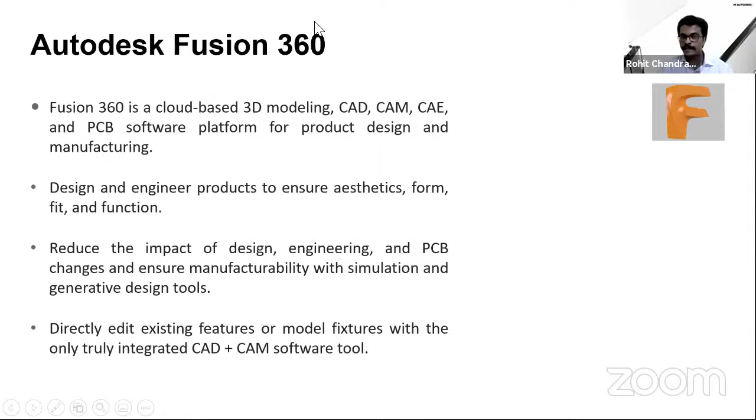Our focus is on industrial design technology alone. We are not going to divert much to CAM, but I will give an introduction to that. Our main focus is how you can start from scratch, create your own model, and for the competition, if you are provided with a problem statement, how you can understand it and use our software to turn that into a creative outcome.

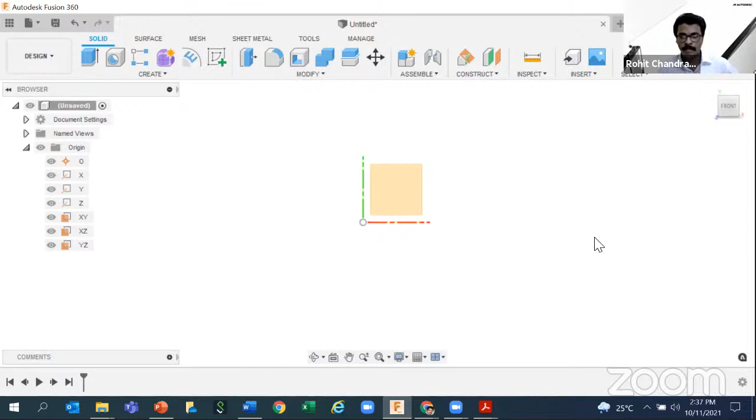Also, please understand there are some color codes here — very easy to understand, you don't need to memorize anything, because this may be the simplest software that you can understand in a few hours. I'll take you through the quickest approach so you understand most of the tools, and apply that knowledge to your live models as well.

So let's move forward. The canvas, the browser, where it comes as a tree, sub options will be there, and at the bottom it's known as the timeline. Right now it's blank, nothing is there, but shortly it will be filled with some options.

You definitely need a 3-button mouse, with individual left, right, middle, and scroll functions — all of these are applicable inside Fusion 360. Primary selection can be the left click, but you can change the mouse settings as well — everything is user friendly, you can change it.

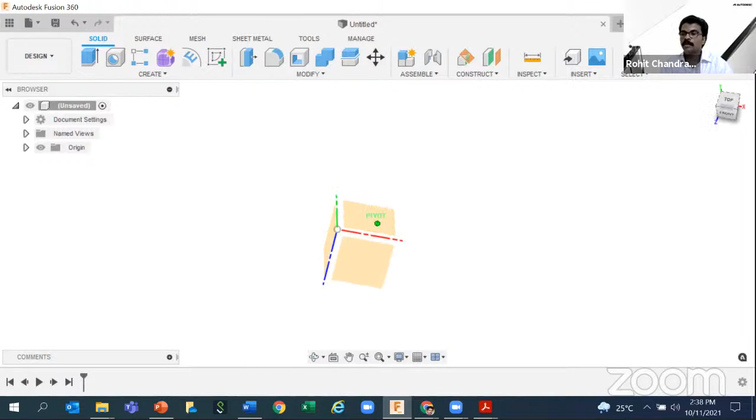There's a cube on the top right corner, with each of the 6 faces designated with an individual name — front, top, side, and so on. I can click on each view and hover to that view directly using my left mouse button. I can scroll in and out to zoom in and zoom out.

Never mind, nothing is there, but small change is there once I click on zoom in and zoom out. Hold down your middle mouse button to pan. So very simple. If you want to make any primary selection, left click is your choice. Then if you want to move something, pan is the option.

Scroll in and scroll out, zoom in and zoom out. Again, there is one extra option for you guys, known as the marking menu, by just right clicking. That's it. So we have some advanced people, some intermediate also there, so I'm not going to go too much on scratch. Meanwhile, we will share the contents.

Just to give a heads up to those who are new, so you understand quickly how the software is working. The canvas, the view cube, the origin plane, and the axes are color coded with RGB - red, green, blue - in accordance with the same axis. So it's very easy to understand which axis, which plane you are in right now.

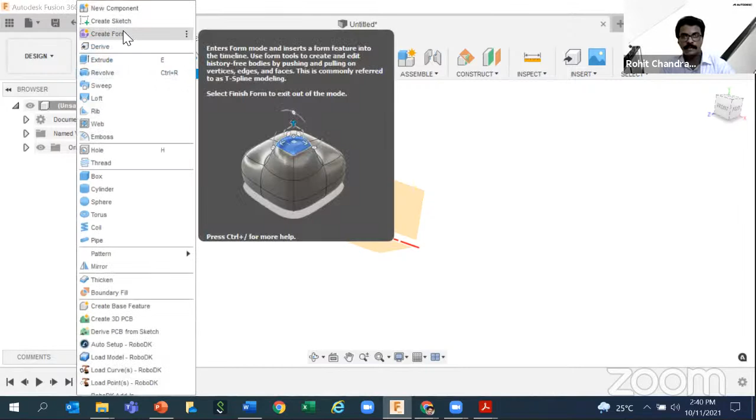Now we have something known as create, modify, all those things. But again, lots of minute options are here, maybe confusing to you. So I will tell you the quickest approach: start from left to right, as you read a newspaper or any book or anything that you like. Some creating options are there, where the sketch is also mentioned.

And the modification options where you can modify the created steps. Then there is an assembly option to assemble those things which are created and modified, and a few more extra support options. I will explain in detail. I don't want you to get confused.

So we are going to start a sketch right now. We will make a 3D model out of that, and that will be a different 3D model option. I told you about some color thing, color code, right? So here the color is actually on blue.

And if I click on this surface option, I can see orange is coming. And when I click on this mesh, some other shade is coming. But they have some unique shade, right? Solid is all blue.

So just understand these are the tools for doing your solid modeling, which have some definite thickness. Surface means no thickness, but you can have similar - not the same, similar - create option, modify option, something extra will be there, as these are for the surface modeling. Then sheet metals are there.

So all these are actually interrelated. Whatever you do with surface, it can be thickened to make it a solid body. So it's like a communication to and fro - not a separate thing. Just one type of modeling and another type of modeling, and together we can collaborate and create an assembly. That's the story you can understand from here.

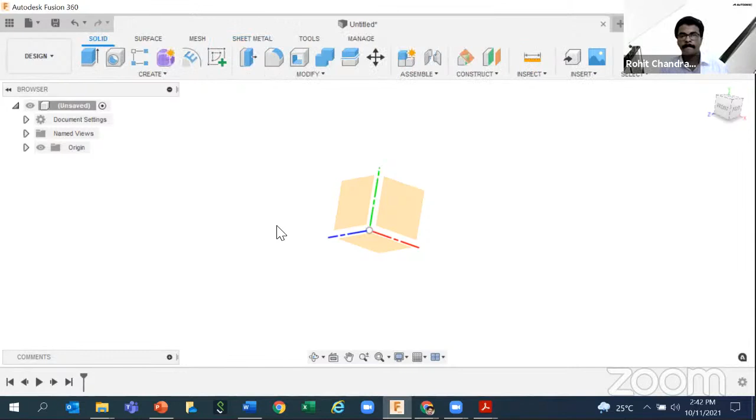Now, before going for the sketch, one more interesting tool is that I told you this is the cloud software. Before going, let me ask Shubham that everything is fine, or can I move on, or what's the status.

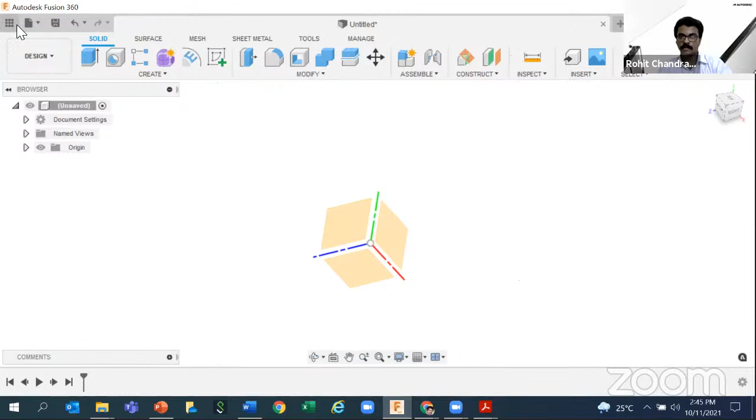This is nothing but the data panel. On the top left corner, you can see the data panel, a small 3x3 matrix icon. Just click on that and a floating box comes out from left to right of your screen. Once I scroll down, I can see lots of folder-like things, which are actually known as projects. I'll explain this in a few minutes so you can start along with it.

On the top left corner, you also see something known as team account. If you remember, this is the name you gave initially to set up Fusion 360. That's why I mentioned you can give your own name or some fancy or unique name, anything you like, and it will come to your account only, showing on the top left corner as your team account. By default, everyone has a Fusion team for their account, and the name shows on top left. Very easy concept.

Now I'll tell you how you can enable a new project and how you can share access with your colleagues. There's an option called 'new project.' Just go there and type a title for your project, for example, IDT.

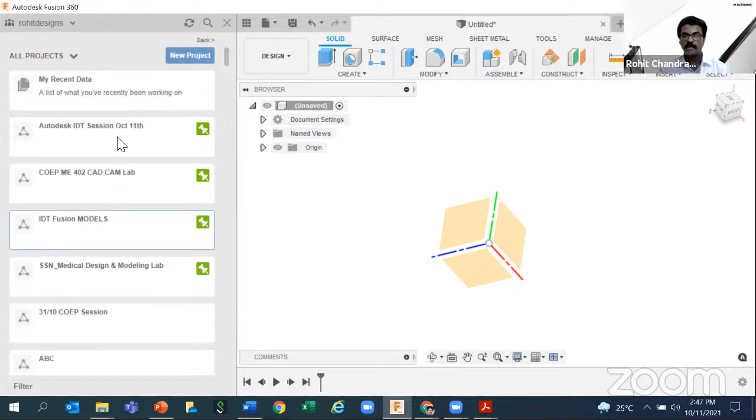Fusion models, this is actually your project name. For initial users, you won't have this many projects like I do. But it's a simple concept: whatever project you type will be listed in alphabetic sorting. Since this is my usual account with multiple projects in my cloud, I want to pin it irrespective of alphabetic order. There's a small pin and unpin option for that. So this is it, just now created project.

Right now nothing is there. So we basically have how many tabs? 1, 2, 3, 4, plus a gear symbol and a globe symbol. In just 2 minutes I can explain this, because it's a very interesting concept.

Data means whatever data you upload will come inside this data content. So how to start? Upload - you can select a file from your desktop, and I'm just uploading one file from my desktop.

Before uploading, let me tell you that Fusion 360 acts as a bridge between other software as well. That means if you have a non-native Fusion file, you can still open it in Fusion 360, and the extension type of that file will be automatically detected. If it's a STEP file, IGES file, or an STL file, it will be automatically recognized by the software.

Right now, this is a native file - F3D stands for Fusion 3D. Size and everything will show up. I'm just uploading this for showcasing purposes, to the current project. While uploading, you're not supposed to keep that window open - once you've scheduled the job to the cloud, you can do any other parallel activity. You don't need to wait until the cloud upload process completes.

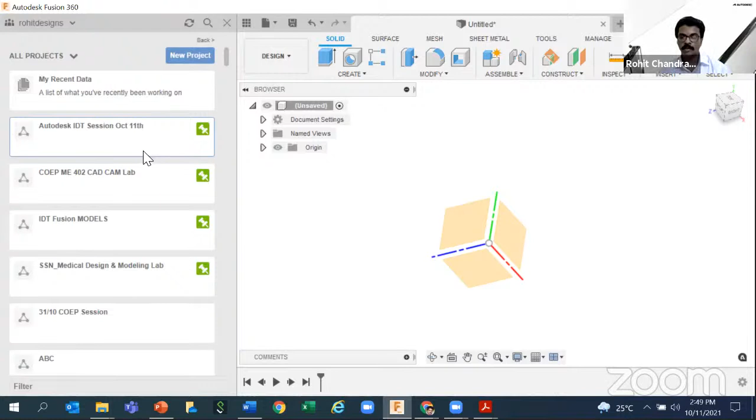So some extra subfolders are there, and I had invited multiple people. Just type their mail ID, click on invite. That's it, nothing else. You can create your own project right now and start saving to that specific project, so that it acts as your cloud storage. You don't need to save to your system; whatever you do primarily goes to the cloud, saving huge space. So you can start creating a new project with Fusion Teams and put everything there.

Okay, we'll come to the contents right now. This is a quick explanation of the data collaboration part. It's not yet fully done because I explained sharing with people - just type their mail ID and click on invite. Automatically there will be an auto invitation sent to your invited members' mail ID, and the person has to just switch the account from the top here, the switching option is there. But if I go on explaining, it's actually boring.

So in the shared drive that I shared with you, there's a detailed guide on what Fusion Teams is and how you can start over. Once you get access, you can understand how quickly you can access all those things. But for starting, this will do - create a new project, and if you want to upload you can do that, or click on this floppy disk symbol to save anything you do here to your respective project. That's how it works.

Now let's start with the sketching. Small sketching - I will explain how to start a sketch. So where does sketching come from? It goes to Create Sketch. Any plane I can select - I'll select this plane, so that means the XY plane is an axis pointing towards me. All the tools are 2D this time because we are in the 2D environment.

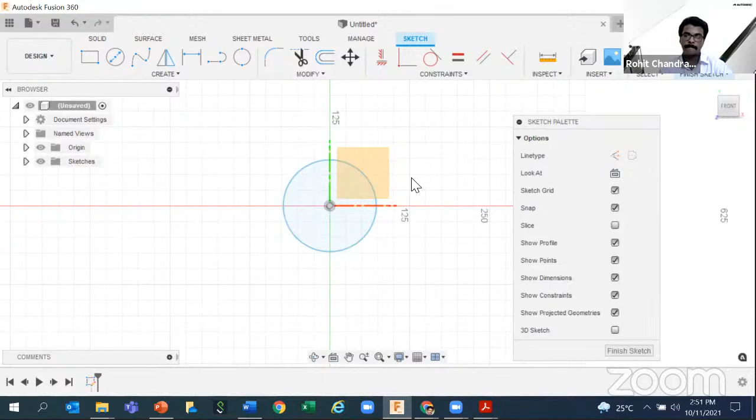Let's say I take one circle - and for circle I have more options, so many options are there. I will just take one center diameter circle, click on escape, so I had activated a circle. Now the circle is about to increase, meaning shrink - you can shrink it or scale it, increase or decrease the size, because I hadn't specified any dimension. That's why it's coming as blue.

Now let me take some lines here - that too comes as the same thing. But before clicking on the endpoints, there are some recurring values, so let me give some values there - 100 or 90, tab, 180. So I can have a specific value as well. Either I can play with the tools or go more specific and constrain it specifically, that's the meaning.

So simply what I meant is, for a rectangle, I can skip the dimension so the rectangle will come like this. But if you want to give the dimension, there is a dimension tool. Like this, numerous options are there in Fusion. So what is the best method? You can get the tools instantly and do the job and finish it.

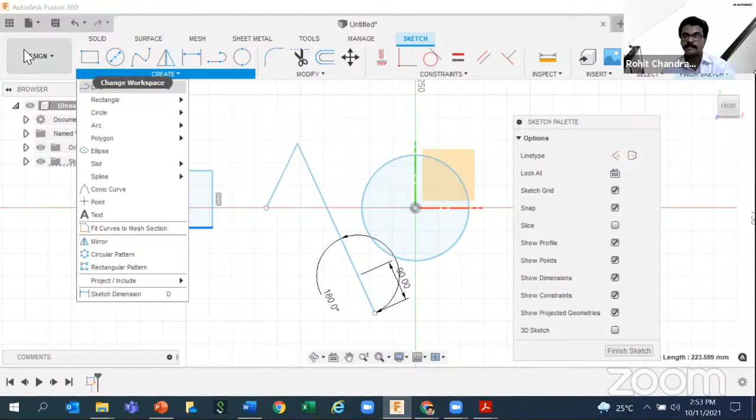If you want a line, there is a shortcut - L command. If you want a circle, C. But other types of circles are there too. To easily call all the commands, whether in sketch, design, or manufacturing, in one go, we have a shortcut method for you - just type S on your keyboard. S for shortcuts, capital or small, not case sensitive. Then type the thing you want, say line, and you will get the line command.

That's it, again type S anywhere. Type S and type rectangle, and you will get whatever command starts with rectangle - that phrase will appear here. So this is the easiest method, instead of directly going from Create to Modify to find the option, type S and get the command you want. But that's not the big thing, we have two more things to understand here. For the rectangle, I have to dimension this - so type S, you can either type dimension or simply type D. S is the thing you can always remember.

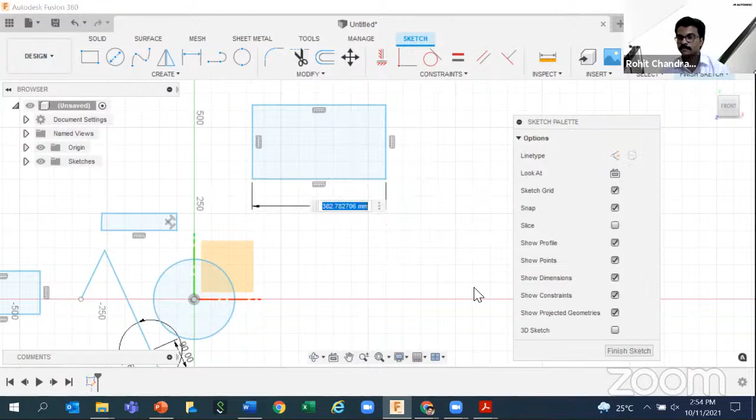Next, I'm just giving some dimensional constraints so that it won't grow or shrink, because it's 200 by 200. Clearly that's a square, but I have more intention. I have to fix this guy. So either I can use the dimensional constraint by typing S dimension, or just type D to activate the tool.

You can set a value so that it's 100 mm away from the y-axis. Same thing you can do here as well.

So it's actually constrained. All other guys are blue, this is black. This is one type of constraining: give the dimension with respect to others, block all the degrees of freedom, so it turned into black. Similarly, I have one more choice.

Again, I am simply deleting the constraints. Deleting means click on any entity you want. There are some symbols also, I will come to that. Right now, once you create anything, you can skip the dimension, and later you can give the dimension. Or you can give the dimension in the starting and proceed.

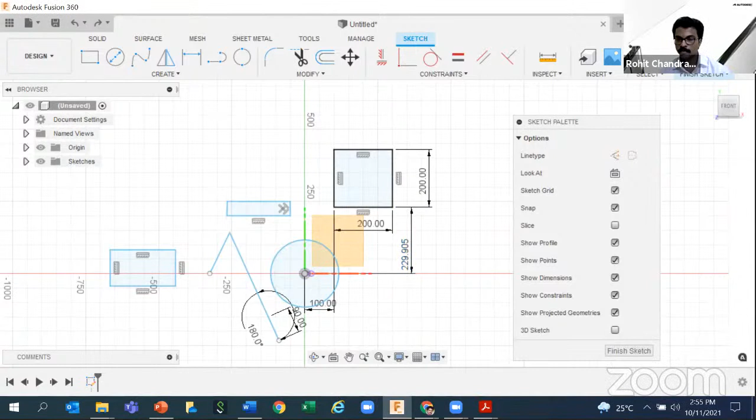I'm audible, no, Shubham? Yes sir, Shubham, can you please confirm whether my audio is clear? Yeah, your audio is very clear. Hello? Hello, I cannot hear you, Shubham. Am I audible? One second. Can you put in chat if I cannot hear you, Shubham? Am I audible now?

Okay, thanks. So if you draw something, you can constrain that. Constraint means limit the degrees of freedom, using dimensions, or again a new thing, known as geometrical constraint. Once I open the door to these other options, quickly you can understand these new sets of tools, some with symbols. It's a type of constraining tool. So few tools I will show, then we will move forward with the live example.

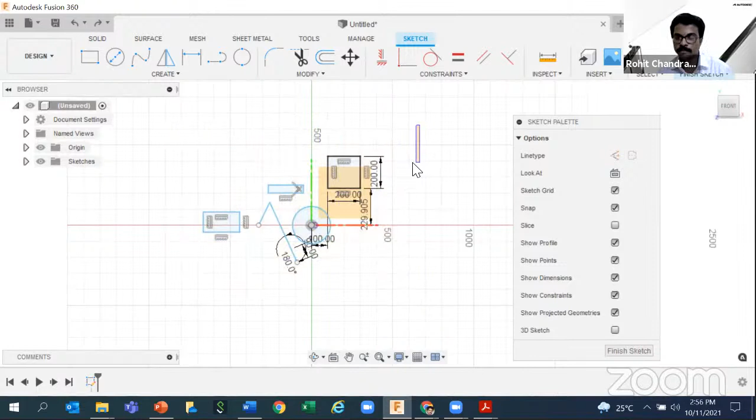Correct? So here I am just deleting all those things. I am just dragging, selecting inside my window, and just deleting. Clicking the delete key on your keyboard, or right click delete from the marking menu. Many user-friendly options are there. So just understand, this is a software which has multiple features. Whichever you feel okay with, you can do that, with a combination of one tool, or just using the shortcuts that you feel right, and you can complete your designing.

So I'm just selecting here. Either I can do right click delete, and it will be deleted, or modify. You can check the available options, that you want to make it trimming, extra things are there. Okay, I'm not touching all, what is too relevant I'm just touching, because we have more things on the way.

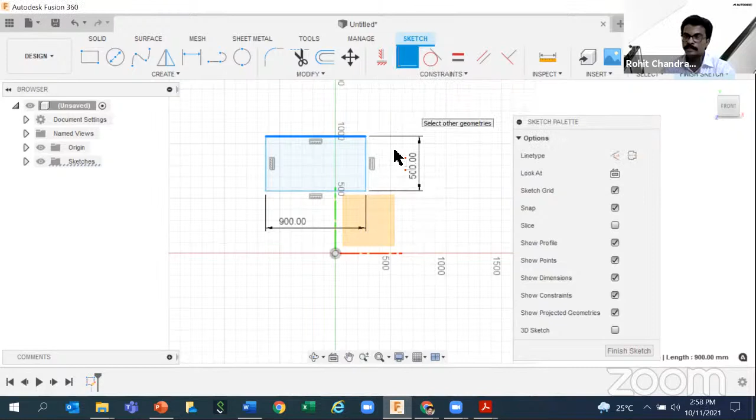Right, so here also just keep dimensioning. Then I told you it got constrained, but one more thing I have to do is make it geometrically related. So there is one option known as coincident. I can click here and click this point, so that it will automatically merge point to point. So it will be clearly coincident.

Similarly, if you have a circle of, let's say, 200, then I have a line, I can use the tangent constraint. So basically it means establishing a geometrical relation between two sketch entities. So I can constrain that - constraint means from there onwards, if I try to move, it's constrained to that path.

But here it's black. That means it has all the geometrical definitions as well as the dimensional definitions, so that's why the sketch is black. Otherwise it will be blue. Blue means free to move, it's not fully constrained - maybe partially constrained, or completely having full freedom of movement. So that's the concept for constraining.

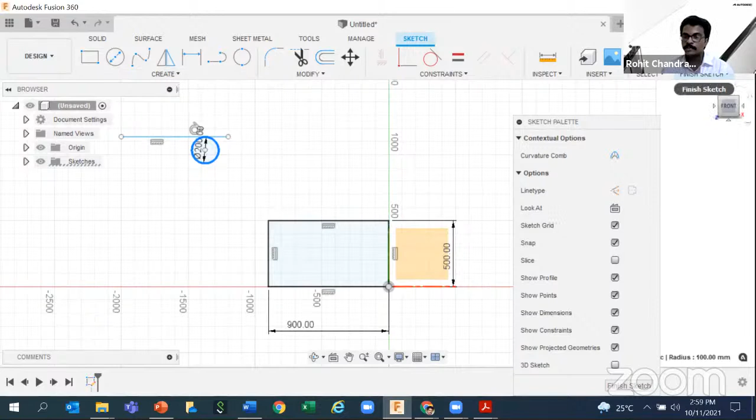Okay, so right now what I can do is click on Finish Sketch. So I have two things with me: the blue category guys and the black thing. This is the black part, meaning it's constrained, so it's not free to move. Blue, free to move - I can do like this. If the circle also doesn't have the dimension, I can even make it bigger or smaller. But I had given a dimension for the circle.

Right, now what we are going to do is go for the 3D modeling. So one command I will show directly, and from the next command onwards we can go forward with some examples. So this I am just creating, I'm just showing how we can use this rectangular sketch to make it 3D.

But before that, even if you are new to CAD, please understand extrude, revolve, loft, and sweep - these four options will be default in all CAD softwares. The name will be different, like subtractive blend, or push pull, press pull, but the concept remains the same. The good news is that inside Fusion we have a few more extra options to help you. So one is the extrude.

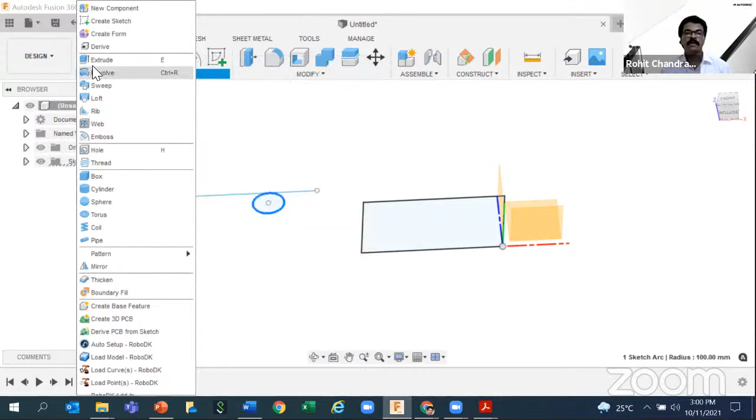Extrude. This is the extrude. Directly type the value either in the up direction or the down direction, plus and minus. Then if you want a small tapering, other software may have an extra option called draft, but here we have that direct option with us. You can give a minus angle or plus angle, and based on that you get the result.

You can also explore whether you want to go with two-side extrude or one-side extrude, because based on the application, just knowing what the tool is won't always help. So my suggestion is, once you learn one tool, in your next designing attempt, try to explore a few more extra sub-options.

Even if that gives you a wrong result, never mind, we will learn something, right? Or else we will explore other learning areas on how to use that tool specifically. But don't limit yourself to limited options. Whatever you know, the knowledge may be limited, so try to accompany it with other sub-options. Why I'm telling you this is that in the IDT category, time constraints are there.

So if your friend can complete a similar design in 1.5 hours but you are taking more time, that means if there is some choice in the tools, some optimized tool process or approach, you can select it so you can finish on time. So make sure you have good exposure to the tools.

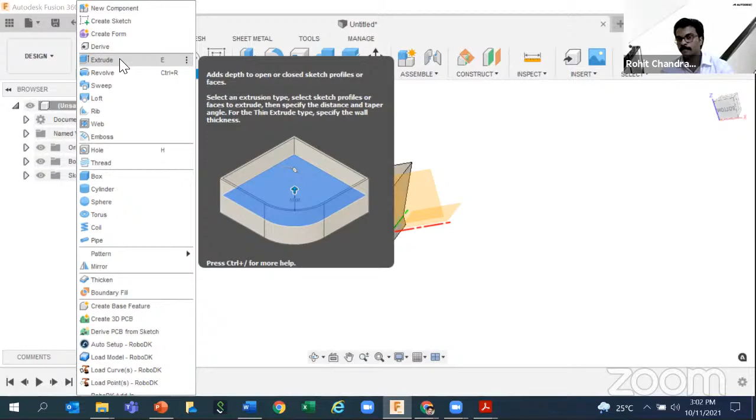Right, so just now I did a small extrude. What is extrude anyway? Just move your mouse over the top, don't click it, just hover your mouse. We can see what extrude is - it adds depth to your sketched profile clearly.

And if you want to call the extrude command again, type S and type extrude. So you will have extrude. But I told you there is a small color thing also there - blue goes for solid, orange goes for surface, and purple is something else, known as freeform modeling, which we will explain today. Right now, if you are seeing a blue extrude, that means it's for solid modeling.

Once you understand the basic thing, it's easy for you. Only thing is you have to understand what this blue highlight means, because if you're in surface mode, extrude is there too, but that's just surface extrude, no thickness.

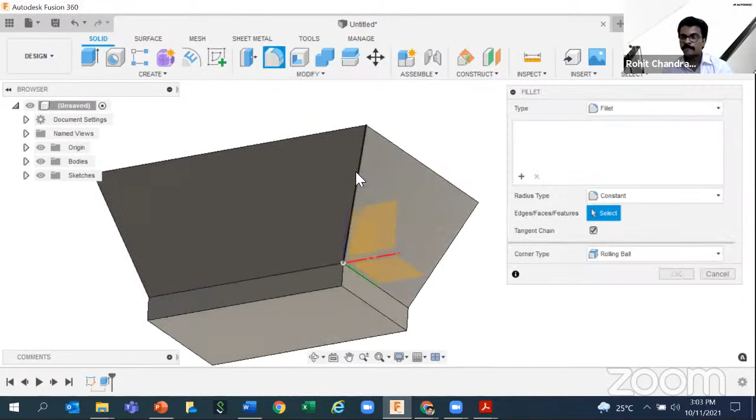Extrude may be boring to you because there isn't that much interesting to see, right? So to create some interest, we can do some extra features in modify commands. The first option is fillet. I'm selecting fillet because it's a user-friendly option, and we can see fillets anywhere in our daily life.

So you can do this, adding a radius, or just removing the sharpness - that's the meaning. Anywhere, if you're a designer or want to design anything, you will automatically give this fillet, because if you want to 3D print that thing and it's too sharp, it will hurt you. So it's always better to have a small radius to round off that sharpness.

So that goes for the fillet. Just give that radius value, clearly a radius value, and click OK. Again you can type fillet and you'll get the command. So accessing the command is easy.

Only thing is, I say just use your imagination - if you think 'I've done up to this, now I want to remove the corners,' it's something known as fillet. Even if you don't know where the fillet is, type S and get the command. Here it is, so I found the fillet. I tried here, and when I gave a small value, it worked.

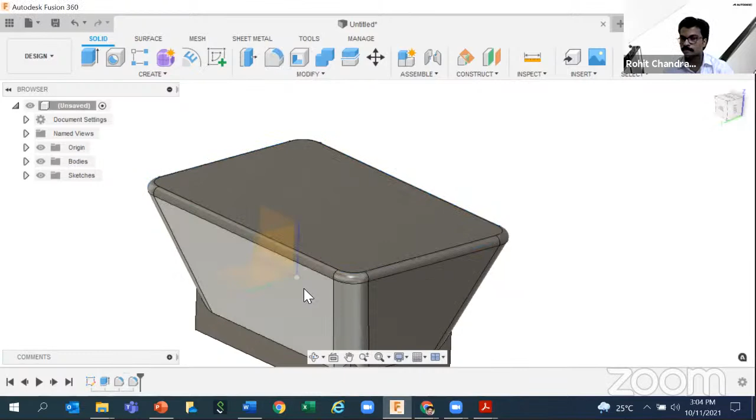So what approach do you want? Either you can understand the concept, or try to imagine or create something you have in real life, like a laptop or a computer mouse. Then you'll struggle to get the exact command to replicate it digitally. There, the learning will happen surely, which will take you to a higher level.

So just a fillet I had shown. Similarly, many options are there. We have a few more other extra options waiting, so let's conclude extrude for right now. Anyway, we'll be using it again. So this is extrude.

Add the depth and thickness, and you can change the appearance using fillet. Just a fillet only I had shown. And if you know what chamfer is, that's also a good thing. Chamfer means this, a small ramp or bevel-like appearance. That's the thing chamfer does. Clearly, if you extrapolate here, a right angle triangle, hypotenuse is coming. That's the mathematical meaning. But understand that if you want to create this bevel edge appearance, chamfer is the option for you. That explains the basics of extrude, which will add the third dimension.

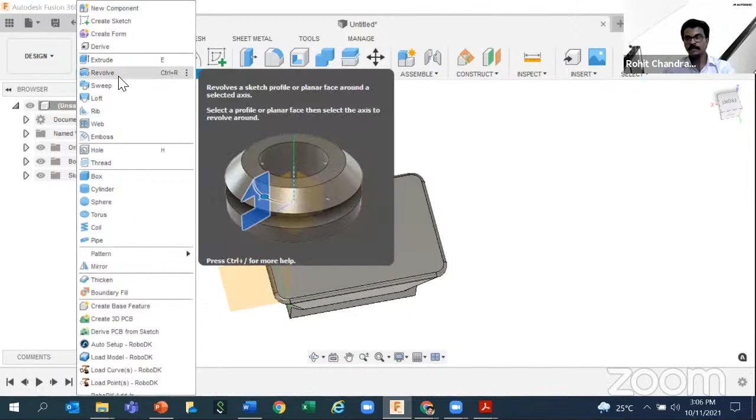Now coming to revolve and other commands. I'm not going to show revolve with just one sketch. I'd like to show that we are going to design a product right now, because industrial design technology is about problem solving. It's not just creating something like this and submitting.

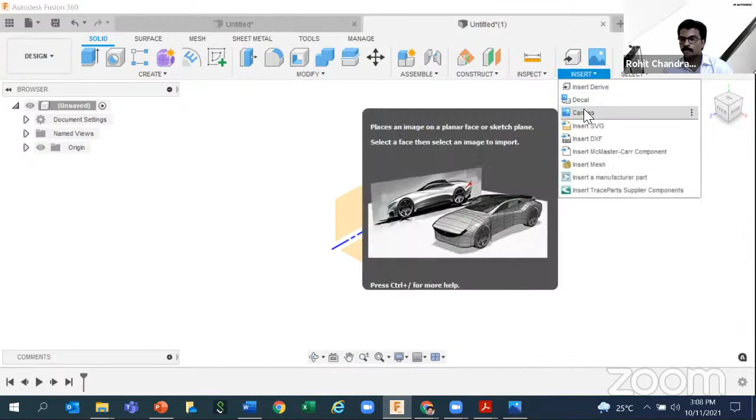I'm just giving you one image; if you have another image, you can directly download it, that's up to you. But I have this image, so I'm going to attach it as a canvas. How can I attach it here? The answer is the insert option. So up to here, the story goes like create, modify, and you can assemble that.

Right now we don't know assembly, but we know it can be assembled. Extra options are here, I'll come to this very shortly. But right now we are in insert, we want to insert the image, insert canvas. So I am just inserting from my system, just the pawn, the same image I had shared with you.

I am just allocating one plane here, controlling the opacity. More image enhancement options are there, whether you want to flip it, control the transparency, flip upside down, left to right, many things are there. But as of now, understand: insert canvas, select the image from where you want, then select the plane.

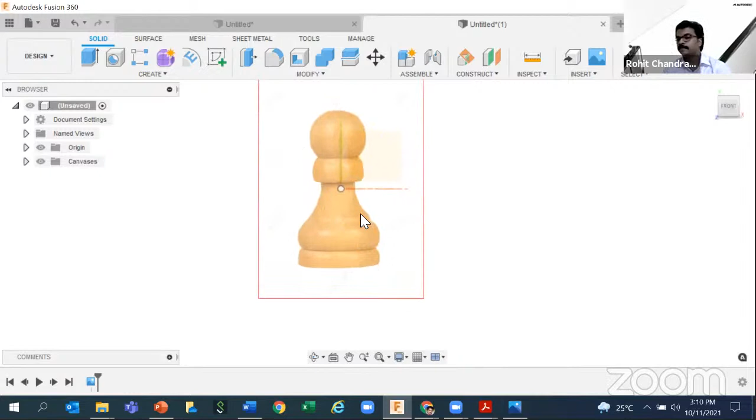So why did I do this? Because I want to sketch the path, I want to clearly get the profile, not the path, the profile of this one. I want to create a 3D model of this just with reference to the image. I'm not wondering about the dimension of this. This is just to give a heads up on how we can use the revolve tool or any 3D modeling tool with a reference image, and how we can create a 3D model out of that reference geometry.

So this is your sketch, your image right now. Let me select the respective plane, go to the sketch where you have this tool known as spline.

Just zoom it, and don't be hesitant to zoom. Don't be lazy, guys. Zoom wherever you want more perfection and spend some time. Right now this isn't that curvy, but it's okay. I'm just telling you, if you want to clearly focus on the exact thing, just zoom and do it. This is for explanation, so I'm quickly wrapping it up. This is like a freehand sketching tool.

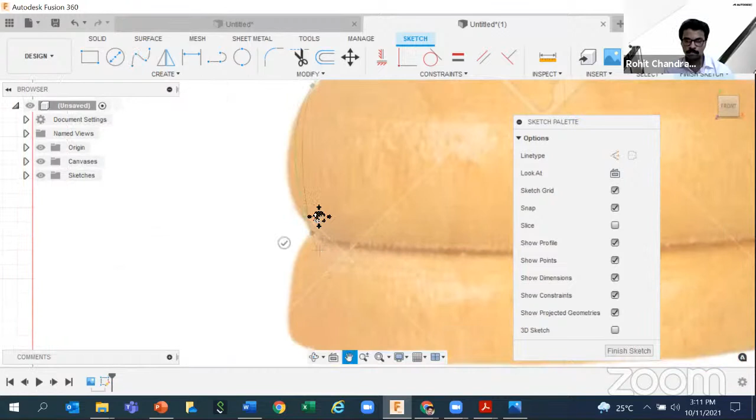Digital version of freehand sketching. I'm going to sketch only just one half. See, I'm just taking the command from the marking menu.

Right click for the marking menu, one second. Create, here the spline is there, fit point spline, I done like this. Now I want to continue again with the same command. Just one right click, the last active command will be coming in the 12 o'clock position on top. I can modify as much as I want, or if I think this is not okay, delete that, then start over once again.

Initially, it is better to have some patience. Later, you will be fast.

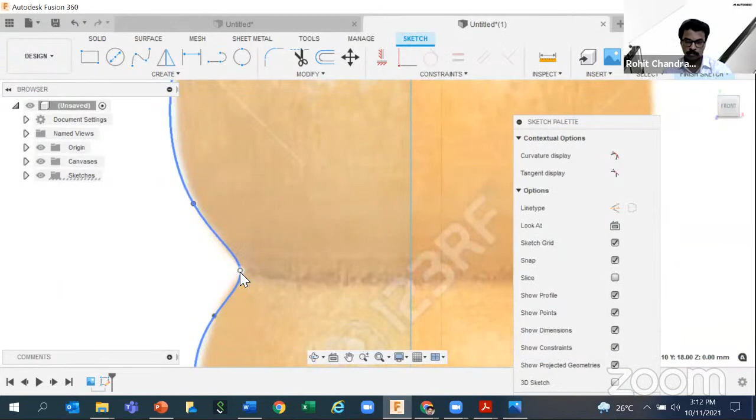Okay, I'm just clicking here and creating the division. So I just traced somewhat, not clear, but some profiles, you know, that you have to do. Do like this for minute adjustment to make it more curvy, because you may be more of a perfectionist. It's always better to focus on the exact thing, so that you can get the error-free outcome. Due to time constraints, I'm just doing up to this. I sketched a half profile, clearly half profile.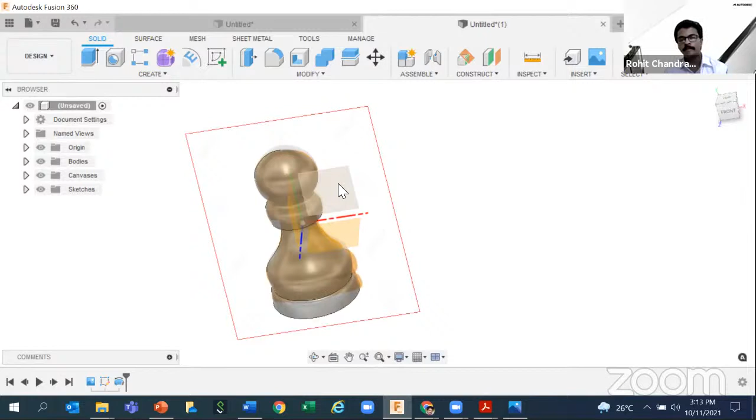So we got our 3D model with reference to the 2D image. This is how you can be more professional, instead of creating one sketch and doing it directly, anyway, you can do that too. You know how to give the dimension, you know there are some constraint options you can do. But if you have an image, or if you want to create a mobile stand, you have a reference. You want to take measurement from your exact iPhone. Take a photo, place it like a canvas image, orthographic view, front, top, side. Then try to replicate using the sketching tools and make it 3D. More easy and more correct, right?

That's it, so that goes for this insert canvas option. You can hide the canvas so you can see the geometry, you can hide everything. So this is revolve. But again, if you want to edit that, you don't need to delete and do it once again. I told you that everything will be recording, so people are watching you. See, it's recording. It's actually known as another type of modeling, known as parametric modeling.

That's why whatever things you do, the software is actually recording in a systematic manner, one after another. For example, if I click here, double click here, or right click edit feature, it will take you to the editing option where I can limit, I can have extra options. Whether I want 360 or just 90 or any specific angle, I can type it here. So this is actually basically an editing.

Quick editing, go to the timeline. This is your timeline, there's a play button. Whatever you want, just make two left clicks, you can edit the respective feature. So this type of modeling approach is known as parametric modeling, that means parameters will be passed from parent to child. For example, if I modify this sketch, some change I made, automatically the change got affected to the child feature. This is how parent-child relationship works.

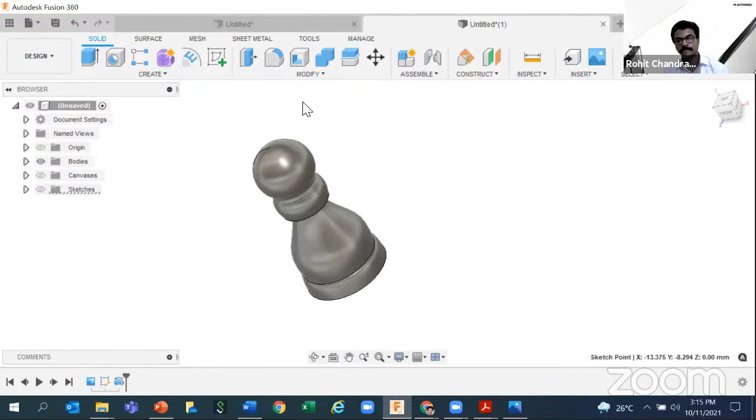Okay, so another type of approach known as direct modeling, that I will tell you. But understand, by default, Fusion 360 solid modeling environment works with parametric modeling technique, so that's a very easy thing for you. We recommend you don't switch this off, because during your competition time also, sometimes you have to come back and edit. Since there's a direct relation between the sketch and the feature and all those things, you can easily play with this timeline and complete your editing. Otherwise, sometimes you have to start from the middle, and it will take much of your time.

Okay, fine, so this goes for the revolve. More good things are yet to come. So let me show you how to save this revolve, where I saved here, Additive Fusion models.

Whatever is currently active, that's where it will be saved. But I can change that - right click and I can move, copy, delete, many things. That I'm leaving up to you. Just understand where you want to save, you can save. It's the user's choice.

Now 2 more other very interesting tools are there, so let's jump to that. I'm done with this revolve, so I can close this.

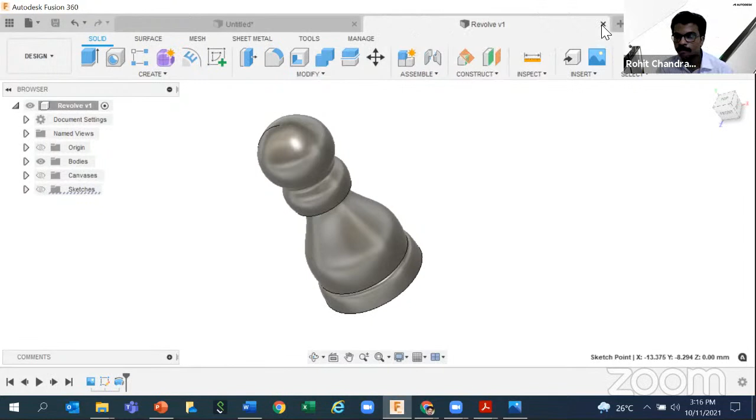Never mind, there will be a practice session, so at that time we will be applying the same tool knowledge. So that's your time actually. I will pause so you can ask questions, and I'll be happy to help you. It's not just a one-way session, please don't think like that. I will give you inputs, highlights on what this is, what it can do, what is the limit - there are no limits actually, what you can do with this. Then a small practice problem statement, a small activity - how you can add and show up your skills with what we learned today. That's the purpose of today's agenda.

Okay, so we have up to this. Now the new tab again. Let's create something - let's create a new sketch here. Then I'm using a spline to create a pattern, a curvy pattern like this. Done, I had done up to this.

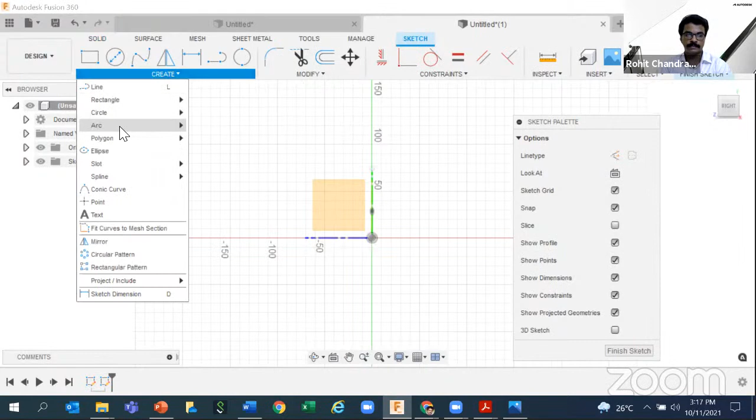The next thing is I'm going to select here, then I'm going to create a next sketch. This time I'm going to select a circle, center diameter, and I want to touch the center to the beginning point of that curve. So I automatically got like this.

But never mind, if in case it is not touching, there's a constraint known as coincident - that one point to the end, the starting point of the spline, you can easily stick it so it will be sticking together. Right now it's automatically got snapped because snapping - auto snap is there inside Fusion. So I did like this, but no dimensions were given.

So I can play with this like this, can increase or decrease the curvature. Now my next thing is, let me hide the object - something like a 3D sketch. In 2 planes I have 2 sketches. So how can I make it 3D? I want a pipe actually - this is my profile and this is my path. I want to make it 3D.

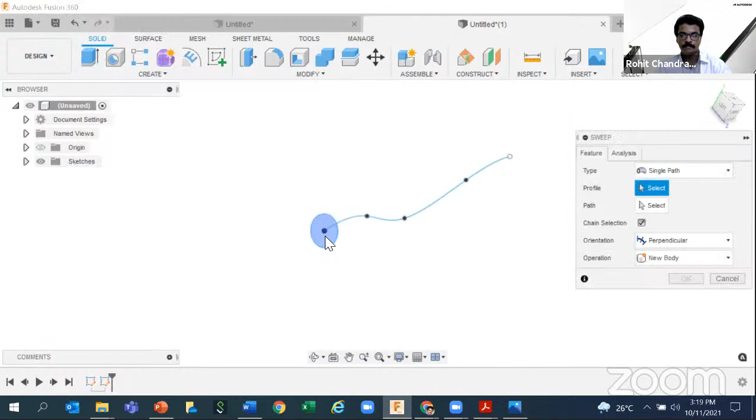So the answer is sweep. So path - you'll get this. And you can control the travel also. This is very simple - one profile and one path.

If you are using a broomstick to clean your home, or if you are going to sweep a broomstick on a beach where sand is there, and you are going to create a pattern with the broomstick - imagine that wavy pattern you're going to create will be the path, and the profile of your broomstick end will be the sweep profile. So just imagine, whatever 3D thing is actually all about imagination. If you understand it in a 3D manner, anytime if someone asks you what is this, you can understand.

Where this thought will help you is that if you are designing something and you have some unique feature, and you know that some concept is there inside Fusion, but you have some confusion - this is the right tool. So try it, try with the other option, or a combination of sweep and revolve, or sweep and extrude. It can get you the result, or explore more about the revolve. I'm not done with the sweep actually.

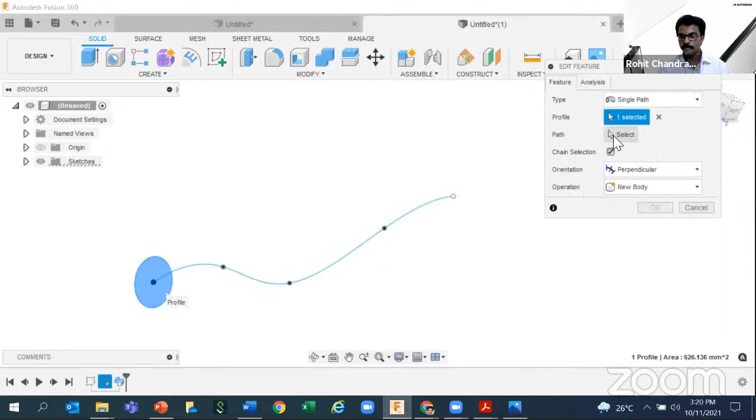So a few more things I'd like to show you. I selected the profile and the path - once again I can show, profile, path. Now there are other options - twist angle, taper angle. So if I change that to let's say 5, here the profile may be clashing, so what I can do is delete the last.

Sometimes the sketch will be automatically turned off. Just turn off the sketch.

Okay, I'm just editing this circle. I don't want a circle. I can simply replace the profile because it's parametric only. That's the reason, so understand the small theory behind the working of the software as well. It will surely help you. It's parametric modeling, so I was able to replace that circle into a rectangle.

Now again, I am going to repeat the sweep and the path. If you make it wrong, no worries, you can click on this and reselect. So I got a separate profile. And this is not the thing I want.

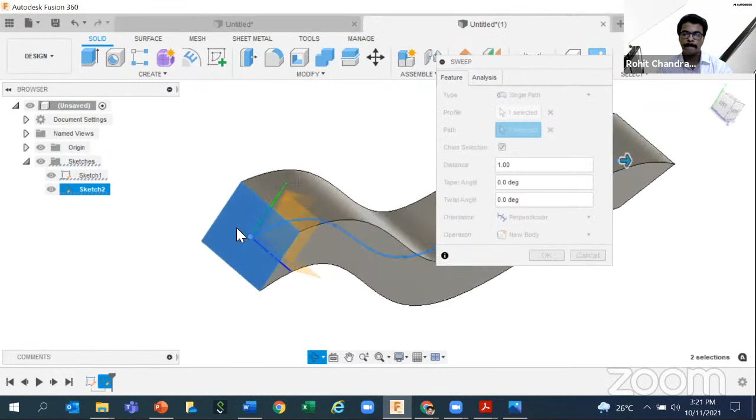I want some tapering, so I can give that taper angle. But some limitations will be there. You cannot expect that the software can show all the outcomes. It's a software, whatever you are giving as inputs is taken as numbers. So some limitations will be there. It's actually a program, right?

So you can give some taper angle, twist angle. Twist angle 5 is too much. The small twisting, 1 degree twisting is there. Let me try with 2. It's 1 degree twisting and it's not in a uniform cross section, it's in a varying cross section.

Okay, so one more modified tool I will show for sweep before proceeding. It's known as shell, because you have to design a product which has some cavity inside. It should not always be filled, right? Something we have to put inside, correct?

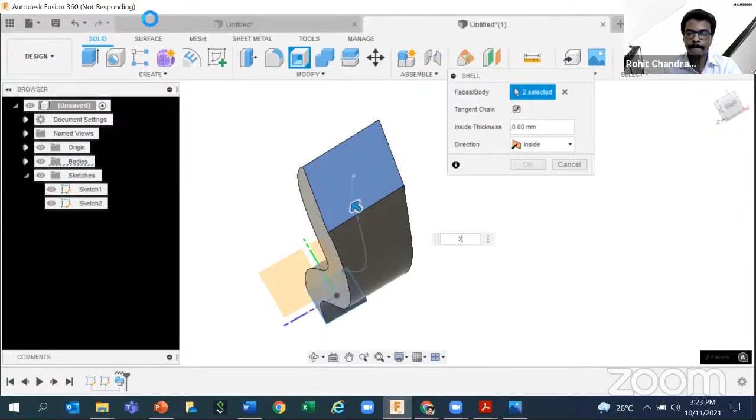Let me stop share and share. Okay, so this is Pooja, and I'm back. I've got a few questions ma'am from you. Sorry ma'am, I don't know why I'm not hearing that. Am I audible? I cannot hear you, ma'am. Oh, you are audible, I hope my audio is well and clear. I'll check and my voice is clear back, okay? But I cannot. I'm audible right? Okay fine, so I'm not wasting time, let me.

Okay, so it's a cloud software. Just understand that we may be playing with the tools initially, so at that time some values will be clashing. Software may show some error reports, but no problem, you can wait for a little time.

But due to time constraints, I'm just taking one more instance of Fusion, because something very interesting tool is on the way. We had reached up to sweep only. Then loft is something different, and we will create some complex pattern with loft as well, and a small activity which will use this tool knowledge. Give me just 2 minutes.

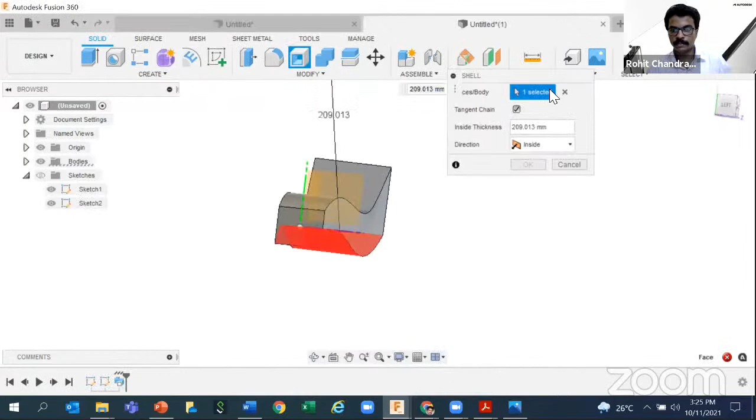Yeah, sometimes wrong selection may happen, so zoom it and you can select. Okay, we will come back with the shell because this profile may be creating some issue. Yeah, let's try it.

So see here, before closing, if you come across something like this, don't instantly close it. It says cannot offset selected faces, adjust the offset value, thickness value of selection set. Somehow the selection went in the wrong manner. That's your understanding, don't think that you are doing the wrong thing always.

Maybe a small change can give you the right result, because what I did for this model is I had changed the taper angle to some higher value, so that may be the reason. It can be many things because it's a design thing. Some values that we had given, we think it's clear, but for the software side it may clash between one to other, some intersection. Many things will happen. So I just remove the value, I mean the taper, and just give one thickness.

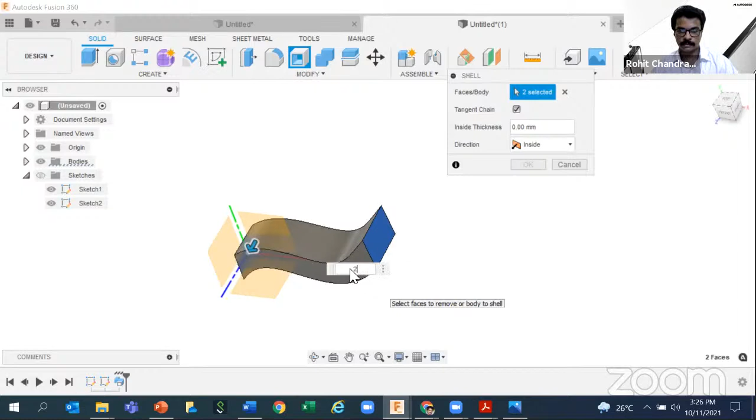Maybe the dimension may be too small. Okay, so shell, never mind that, just understand up to the sweep. We are going to do a shell with a separate model because we hadn't checked the clear dimensions. Once again, we can do a shell with a sweep profile because you should know the tools, how to use it.

So one more profile, and here instead of selecting this plane, I'm going to show you another set of options where you can have extra planes, construction planes or construction lines, the vertex, all those things other than the origin, you can create individually. There are options for offset plane, plane along a path, mid plane, so whatever extra you need, you are supplied with.

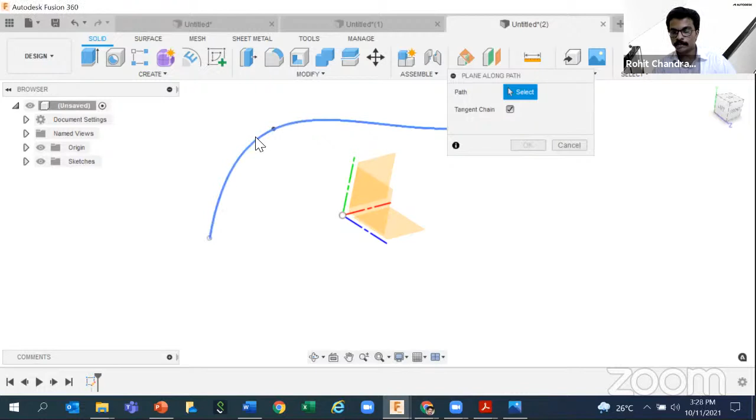So I want a plane along a path. You can have this, a custom thing. So this is a new tool knowledge for you, plane along path.

Same thing I'm going to repeat, this time I will give the dimension. So it's 33, 3.3 centimeters clearly, so let's make it 55 centimeters. It's constrained because it has the definition as well as the dimension, both the position reference and the dimension reference are there, but this is still editable.

Again, I'm just repeating this: sweep concept is profile, path. We can limit that. Sometimes it will be self-intersecting, the body would intersect itself, so we can try changing some values. Whatever error is coming, just read that and try to rectify it.

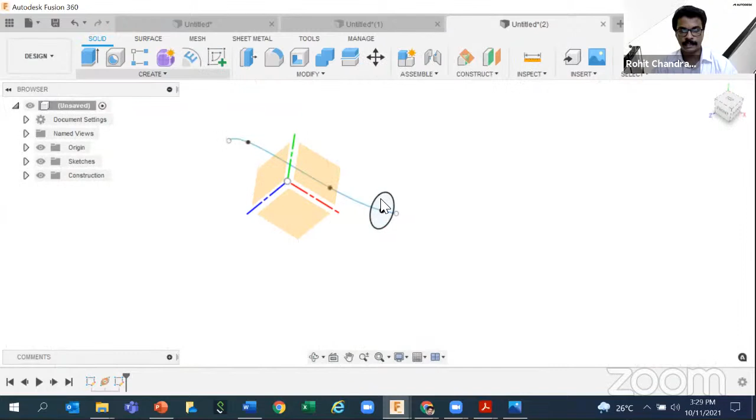Sometimes this is coming as a single path, and the body is self-intersecting. So never mind, we will change the profile then. If something is clashing, change the things.

We can have a 2-point rectangle or a center rectangle. Give the dimensions as 40, tab 40, done, it's a very simple profile. We can try giving the... okay. If you want to make some change, you can do that.

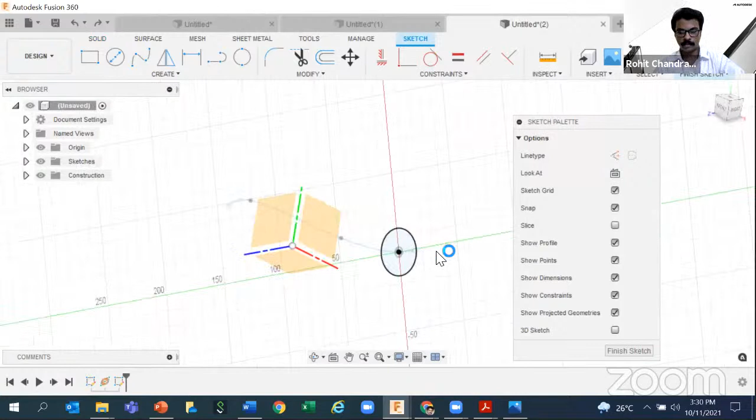Some surface issues are there, so we'll come back to the sweep. After the loft, we will come back with the sweep again. Somehow some settings I made created an issue, so if you can undo clearly using the control Z button. I will explain that sweep once again.

Due to time constraint, I'm going for the next tool, loft. Sweep, we will come back to in just a few minutes. Right now I'm going to explain a new tool knowledge: the loft. The loft is clearly, and another interesting thing...

200. Now I'm going to have another offset plane, 200 mm away, then 100. Now I want a profile which can connect these two. Circle to circle is too easy, you can understand that's like a cut portion of a cone, so it's a very easy profile.

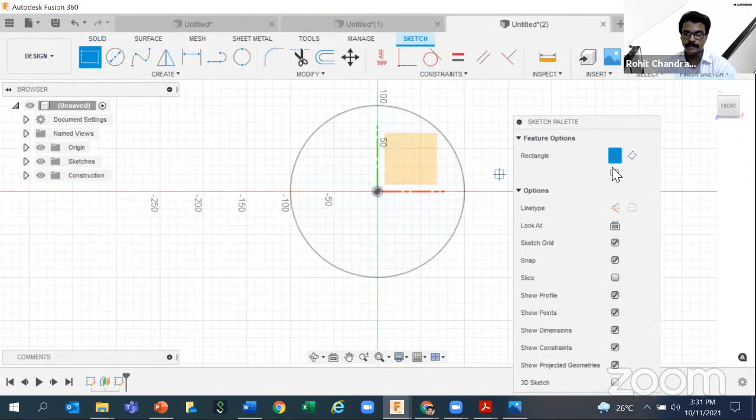So instead of a circle, I can keep it as a rectangle, anyway the concept remains the same. 150. I want to have a connection profile, that's the meaning, so what I can do is...

I can directly use loft, click here and click here, so I will have the connection between these two profiles directly, the software will create the joining for me. If you want to start from scratch again, click on this close, then select it.

Many options are there, so you can change the point tangent, the appearance changes, many things will come here. You can have multiple profiles, if you have multiple profiles you can build on top of that and select that, so you will have a 3D geometry altogether connecting all those things.

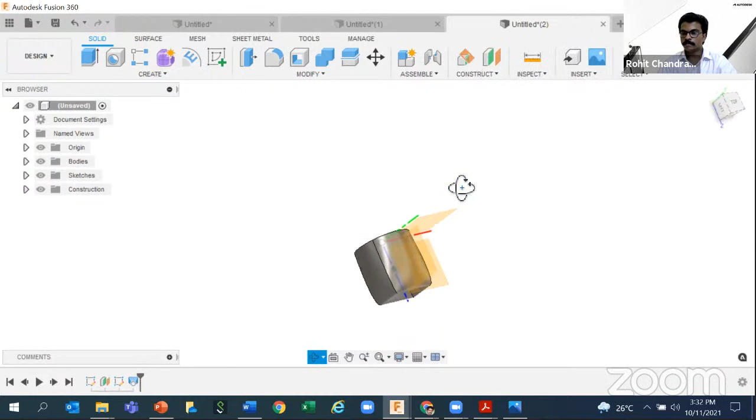But one more thing we can do with the loft is we can sketch on this. I will delete this. These two things we have. Correct, so I will do the loft again.

I got it, so this is the profile. Even if you flip the selection, sometimes the wrong result will come, so make sure that wherever you want to join, you are selecting the right choice.

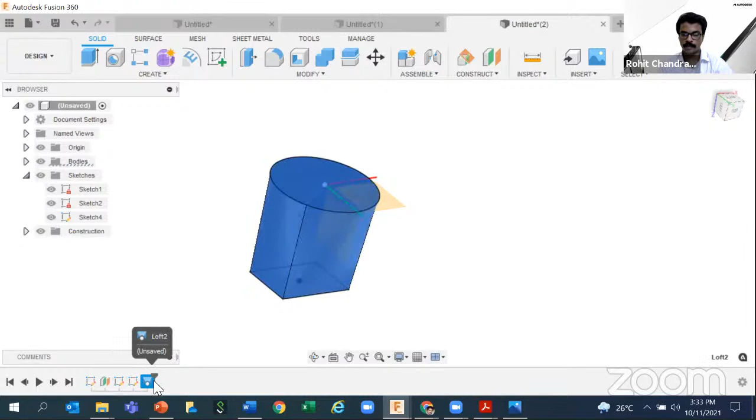Okay, so now going to this sketch, I want a connecting profile with these two, a connecting profile. Now what I'm going to do is I'm changing the order of this loft and the sketch one after another because I have the choice wherever I can keep it, I can swap it, loft after sketch or sketch after the loft.

Now again you can go to the loft. There is one more option known as center line, where you can select that, so you will get the profile aligning to that extra line. So this is another option: either you can build one profile over another, or else you can do it like this as well. So this is one type of loft, not yet complete. We have another option known as rail.

Okay, so after that, open to the queries. So this is one thing.

Now for loft, I had shared one more file with you, inside the datasets. There is an image of a nozzle, like a gardener spray device we use to spray in our garden.

So here, what we are going to do is we can sketch the profile and use the loft to complete this, by attaching the canvas clearly. Save as - I'm just saving this to my desktop.

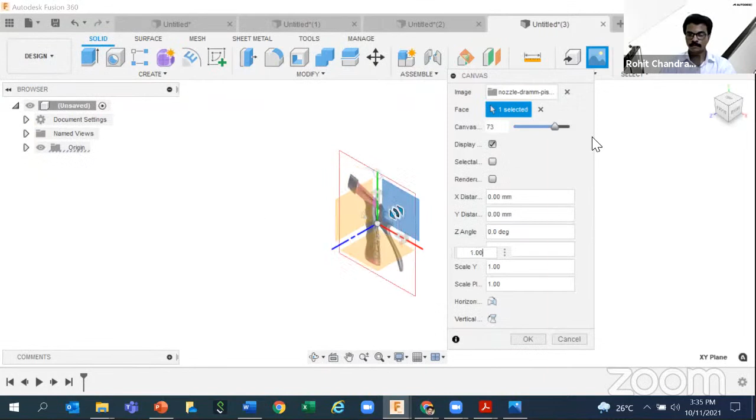For easy access, then again origin, insert canvas, insert from my system the image that I have shared with you. We just place the image. Now we can start the sketching.

Or clearly, if you are too focused on the profiles, first we can complete the profile and then go for the sketching. Construct offset plane, go here.

Create the bottom plane. Then create one more plane so that it will reach somewhat here. If you know the exact height, that is the good thing. Done.

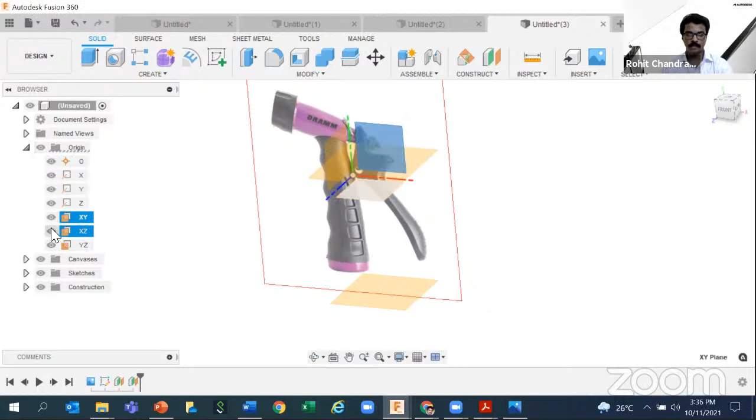If too many things are confusing you, just turn off the visibility, then focus on what exactly you want. I want the XY plane, so I can turn off all other things. Whatever I want, I will be changing.

Now I'm just creating one circle here, then another circle onto the top. Sorry, this.

Let's keep it a little bit bigger. Sorry, it's not a bigger thing, we'll shrink it. We'll shrink again since it's not constrained.

Now we can use create sketch, and we will generally...

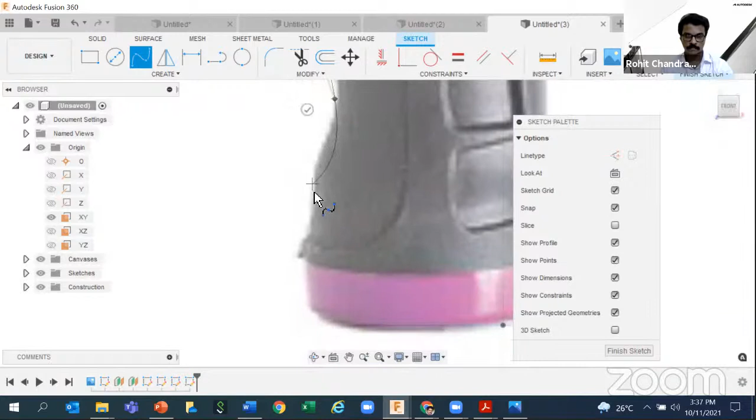I can join here - even if it is not joining, no problem. So here it needs to be joined, so we can use the coincident constraint so that it will be joined instantly. So many options are there helping you to join one thing to another.

Either you can pull it over, keep it nearby and try once again, and try other tangents. Yeah, let's try with this. If it is - yeah, got joined.

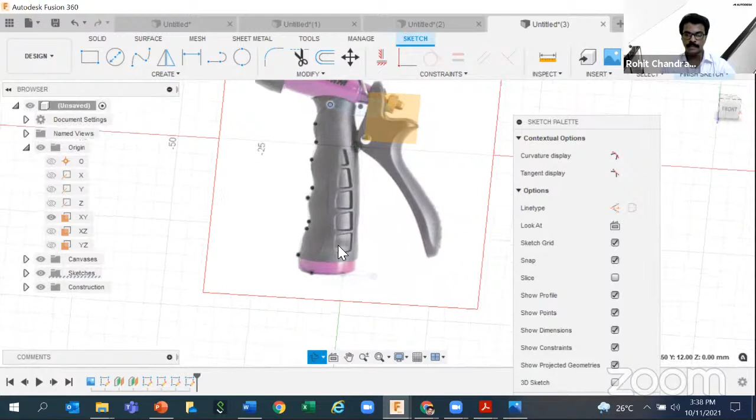Okay, so two profiles and in the middle one sketch is there. Now we are going to repeat the loft. So here I'm going to select the rails here. First we will do a normal loft.

Okay, you will get like this. Now we can select the rails specifically. Okay, now you can change that to cut. Let me check the issue with the profile.

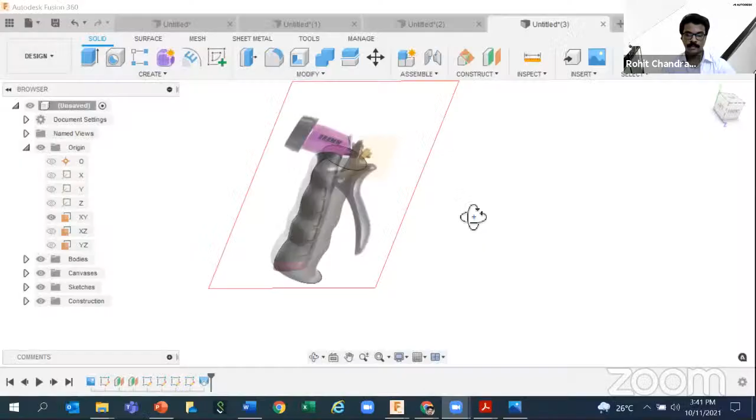So I can share my screen. What I did was, 1 second I can show - selected the two profiles, these two profiles, then there is an option as rail.

Just select this intersecting path. Earlier the mistake I made was it was not intersecting. So once we intersect this and click on OK, you can have the profile like this - see, the handle profile will be coming like this.

So this is actually the issue with the sketches. If two sketches are not intersecting properly, then the issue can come like this - that was the problem that occurred earlier. So sometimes you have to do it once again or try changing the selection process.

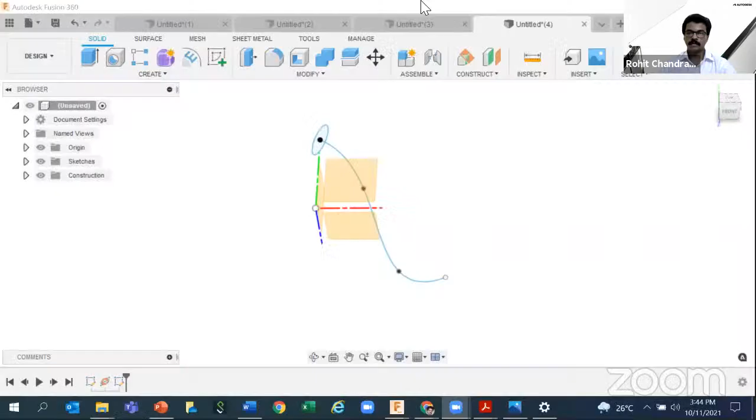Can we use the student education version or free version to practice for regionals? Yes, surely you can use it. I think Shreyans is from a college, so you may be having your reputed ID card, so the same process that we had shared you can use to get access to the product, because the education version is free only. With your proper verification, you can do that, so you can use it for the regional as well as the full event, because it's a licensed version.

So just a quick recap of all the things I had done. Here, what I did was I just hide here.

This profile, the issue comes when it is not properly syncing. Make sure that you use the coincident constraint to properly sync, because in one or two tries it may create a concern, as the profile is a little complex. After that, you will get the exact hand-like feature of the canvas.

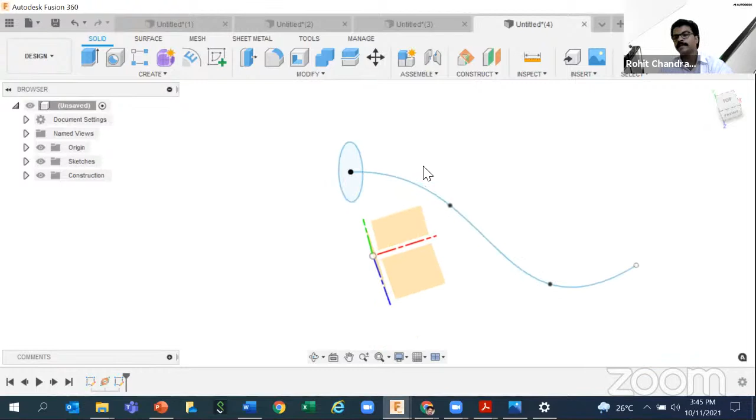Now one more thing, coming to the sweep profile. Earlier I had an issue because one point and another point were not intersecting. What you have to do is go to the sweep, go to the profile, and check here. If the profile is self-intersecting, the error comes because imagine this profile is going to sweep along the path, so it will intersect multiple times along the flow.

So that's why the error was continuous, it's actually based on the profile. Either edit the profile or change the pattern of the profile, and you can get rid of that.

So what is the eligibility to get a free version if I'm done with my studies? Then there is a free version, the Autodesk free version is also there, I mean for personal use. You can search for Autodesk personal license as well as startup license. I'll put the link shortly. Two options are there for you.

If you have passed out, you can use the Autodesk personal license as well as the Autodesk startup license. With the personal license, you can access the software, but your account may not have the extra options that the education options have. Some limitations will be there.

Can we connect with the NSDC and Autodesk team? Then we face issues while practicing for India Skills. Yeah, that's if the rule permits that. If there's an extra session, doubt clarification surely can be done. We will share the mail ID.

I think that will be fine, so we can have it. Yes, we can have extra sessions or extra doubt clarification while practicing. Surely we can do that.

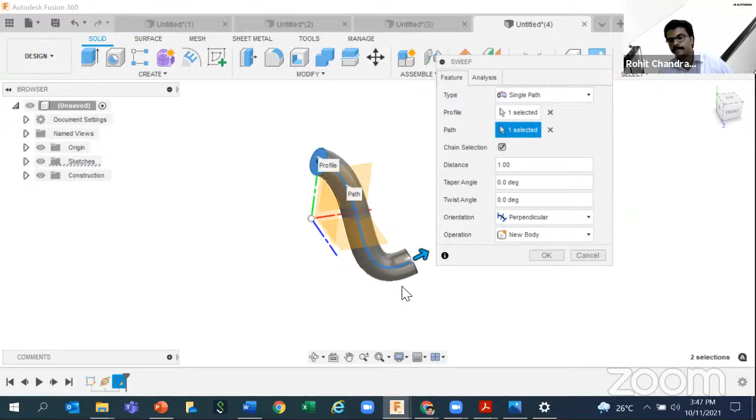How many days of practice is sufficient for candidates to excel in IDT? There is one course we have to complete in 90 minutes. After you complete that, you will get to know more about it. But unless you practice it, around one week will be sufficient time to start from scratch. If you already have good knowledge of another package or good understanding, less than one week will do. I'm not saying you need more time to grasp the content.

I'm a graphic designer, so is this the technical eligibility? Please discuss with the NSDC team as well. Can a graphic designer participate in industrial design technology? I will check it and come back to you, because detailed restrictions as well as criteria are there, so let me come back to you.

I will share my mail ID in the chat for further queries, because we will have one more session on the eligibility and criteria for participating in the competition as a second workshop. At that time, I hope everything will be cleared.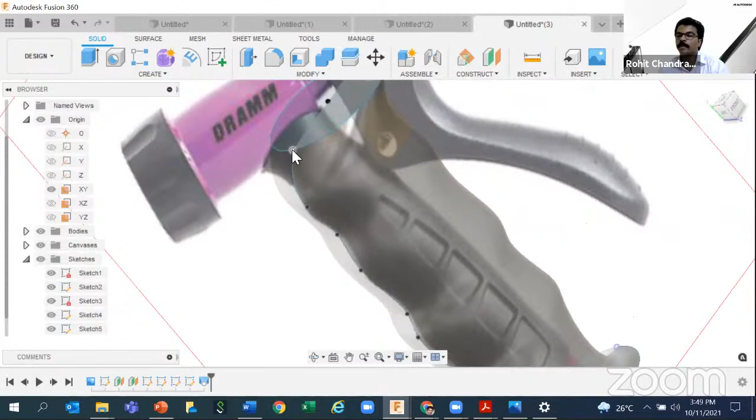Okay, a few more things. The issue with sweep and loft, even though it's easy, sometimes point to point will not properly connect, so at that time issues may come. Try it a few more times, you will find that this point may not be intersecting, and at that time you keep getting wrong results. That's the only thing, but don't worry, try it once again, zoom in and select it. Okay, so that's about the loft.

How does industrial design differ for materials and plastic? Materials and plastic, adding the physical material - we will come to that.

Next we are going to give a small activity to you. I will also show how you can do it. I'll explain physical material and extra material, how you can change the appearance, add the physical properties. Up to now we had reached extrude, revolve, loft and sweep, and jumped over a few construction and modify options.

So now you have one task to work on a problem statement. The problem statement is very simple. There is an activity folder, and inside that there is the problem statement. Design a custom space helmet for your future space travel.

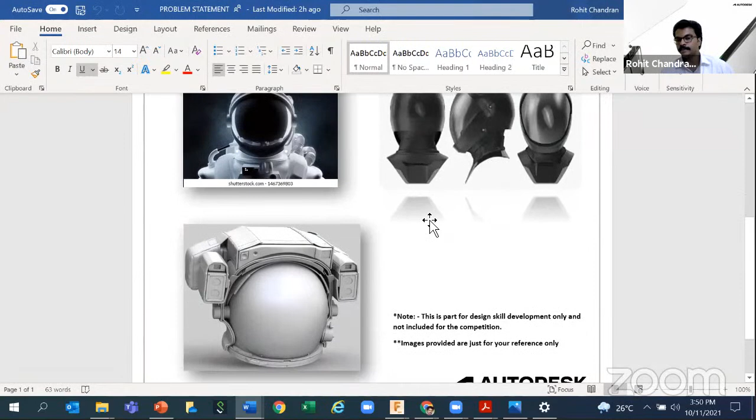This is not a competition, this is for your practice only. What you have to do is clearly mentioned here: use reference canvas, use 3D modeling tools, imagination, creativity. But I will also show you how you can start. You can make anything, but please try to use whatever things you had learned today.

The material, everything I will explain to you right now, because there is also a criteria that you have to add the physical and appropriate appearances. As this is related to industry, material choice is an important thing, so I will show you how to make it.

Right now we are going to design a space helmet for future space travel using the existing tools. Let me start with a new file. Canvas, insert from my system - here I have to upload the space travel image, because I had given you some images as well.

Side view and front view - those two images I had pasted. So once a smaller body is created, I will show you how to add the physical materials.

Okay, this is the problem statement. And in the data sets there are two images: space helmet front view and side view. Just save this, copy this - I'll copy both so I can access two more images.

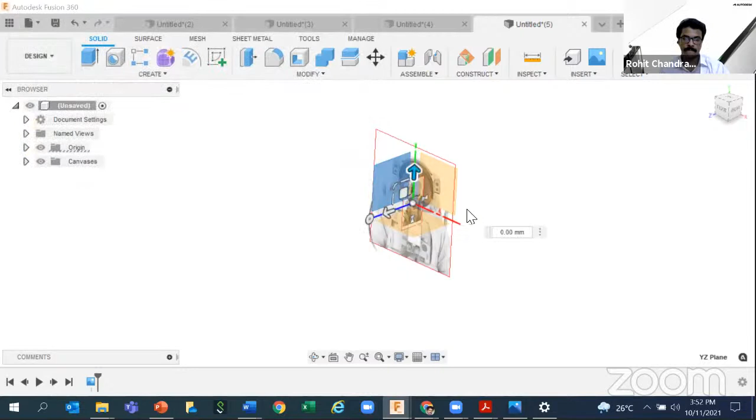Then I can paste it here using the insert canvas option. Insert from my system, space helmet front view. You can check the dimensions as well. So two views I am going to place, and you can check with the front view whether it is properly syncing.

Or else you can take your own image - I'm not telling you that you have to, but this is just a practice activity. In between, if you want to edit anything that you think is not in the proper manner, you can go to the canvas, right click, edit canvas, and reposition it.

You can reposition it correctly. Okay, this is not up to scale by the way, so you have to give an approximate dimension of a human body. This is the option - right click, edit canvas, you can scale it up, then pull it down. Make sure it is coming in the right manner, because the extra image needs to be cropped.

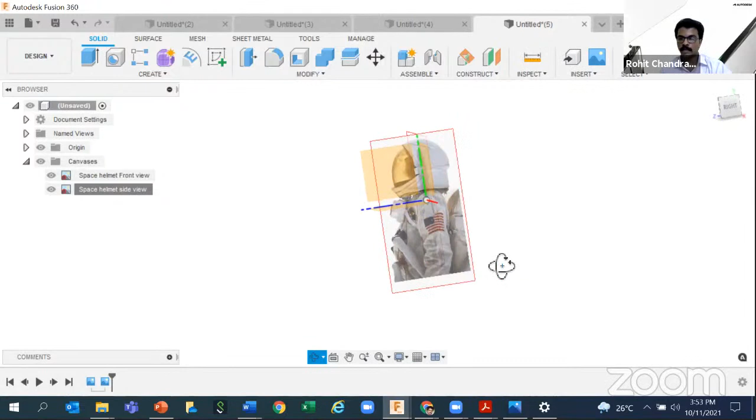These are actually two images, but we need some reference for the side and the front. So this is an activity - I will just show and initiate, then the rest of the things I'm leaving up to you.

The thing is, first we can start with a sphere, because either we can revolve and create a half circle, and revolve it to create a sphere - a ball - or primitives are also there, sphere. So you can click on here, any plane you want, and you'll get the sphere.

You can control the dimension, so wherever you want, you can control it. This is for the front view - the front view, there is a globe-like thing, no? So this is the replacement for that.

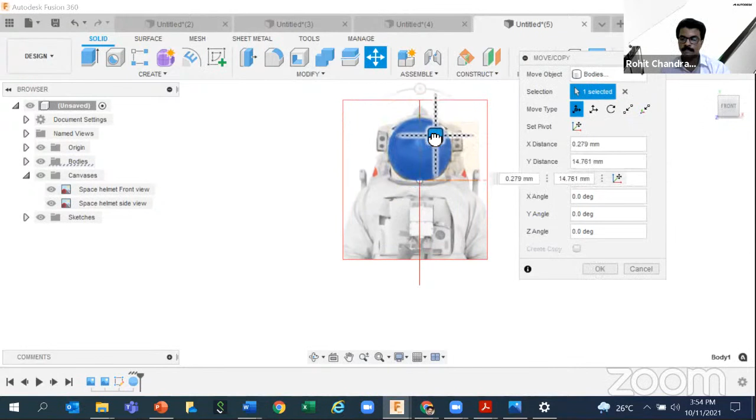Then after that, we can use the move tool to reposition. Make sure the side view is also looking good, but any change you can do that. I'm not doing the full design, I'm just showcasing how you can start. It's not that much detailed design we are asking you - something based on the existing thoughts and imagination.

So we have up to this. Now the next thing is, I will tell you how to cut the body, how to split the existing body to make the helmet divisions, because there is a visor there, no? So how we can have the separate division for the visor from the sphere - that I will show, and after that I will explain how to add the sphere.

So here, spline is there, so gently create that sketch. Okay, just a curve. And we can make one more curve.

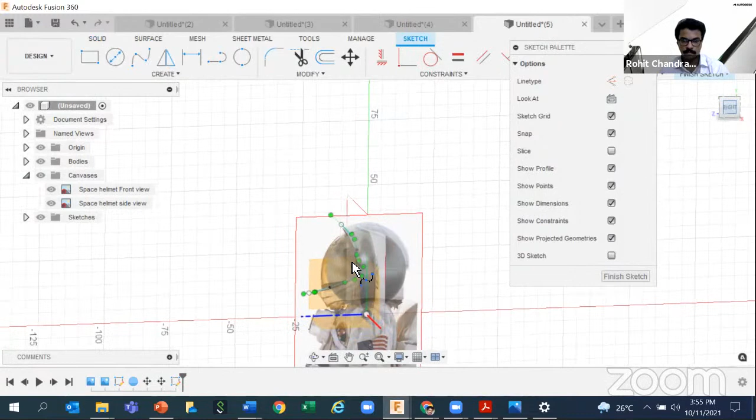Finish the sketch. Now there is an option known as split body. It will simply split the body using the curves we had selected or drawn. There's an option called extend splitting tools. Click OK, and it will divide it as a separate segment, based on your drawing.

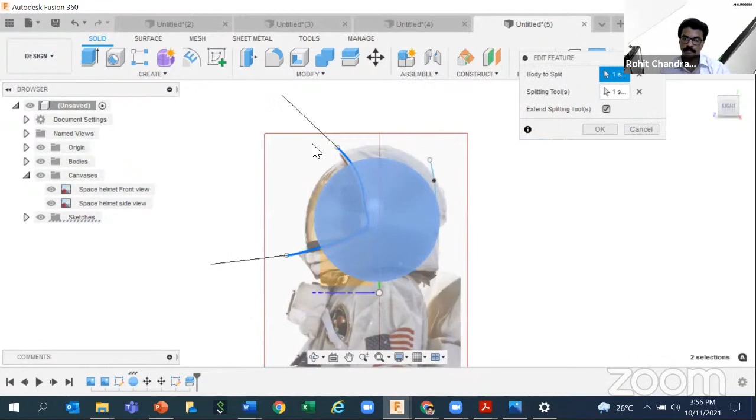Now we have to create some thickness so it will act as a visor. Right now we have one single body. I drew two curves to make a cut, one cut and a second cut. Then I reduced the scale, so you get this effect, and you will get this thickness.

If you want to reposition, it's actually boring since everything is a generic shape, so we have to give it some appearance. Now I can turn off everything, but it's still not complete. So now the body is actually split, the sphere got split into multiple parts.

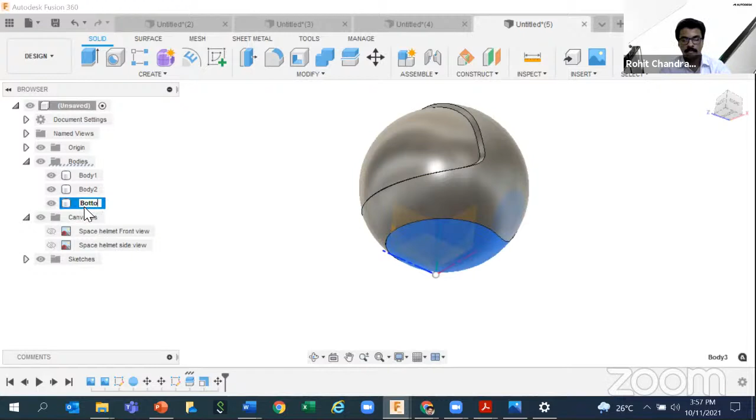If I don't want to keep this part - one tip: if you click on any part, it automatically highlights, and the timeline also highlights. If you click here, it's actually body 3. If I want to rename it, I can go down. See, that will just be hidden - we had just hidden that.

The shape can still be modified, subject to change. But our main concern is how to add the physical material - that was the key question. So type S and type physical material, and you'll get a dialog box. We are nearing the end, we have 2 more minutes.

Once you select here, you have a choice of materials from the library. If I select plastic, I can drag and drop it so the physical properties along with the material get added. Whatever you want, you can also customize - right now I'm just showing what we can do. Just drag and drop, and everything gets added in one go.

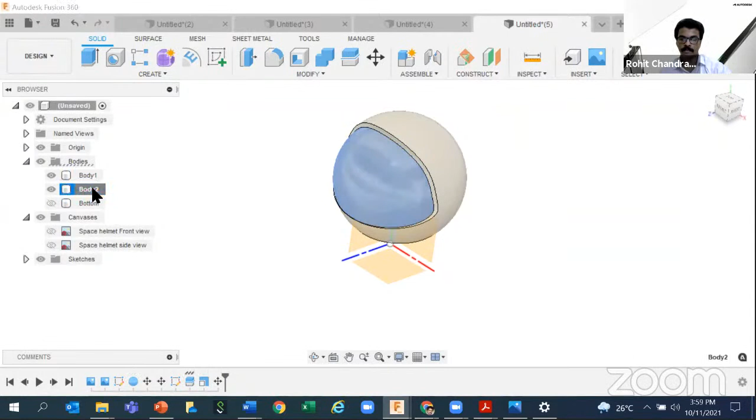So this is how you change or modify the physical material - type S and physical material, both methods work, just drag and drop. Now the question is where I added the physical properties - this is the visor part, so I can rename it as visor. Then this is the body part.

So I just type S. Now if I right click and go for properties, here are the properties - I can see the properties of ABS plastic. For information, if we don't change the properties, it comes as steel by default, but here it's changed to ABS plastic. So for any material, with any number of bodies, just drag and drop - that's the method.

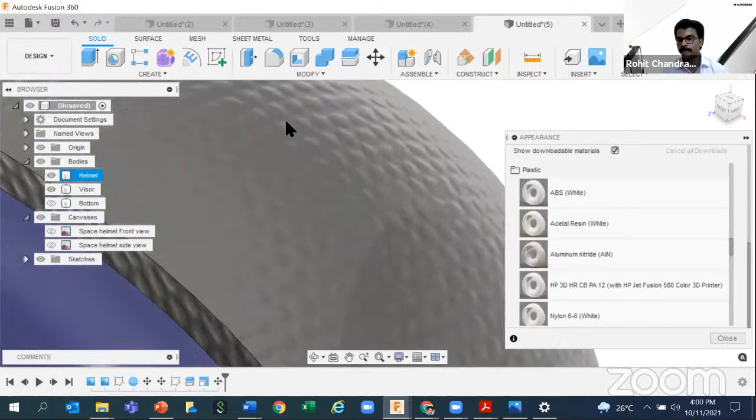So it's just for color only, but you can do it like this. So there are two types of things you can do - one is directly dragging and dropping physical material here. Tomorrow I can show how to create your own material, because right now I've only shown things that already exist.

Before ending, I'd like to show one more thing - the logo part, if you want some logos or branding, how you can do that as well. This isn't complete - I'm not saying this is finished, because for the later part you have to sketch it and extrude it.

You can keep 2 circles. For this time being, I will keep 1 circle here, because you have to take from the image and make it 3D. That's the intention, so the helmet portion may be confusing. That's why I had shown you.

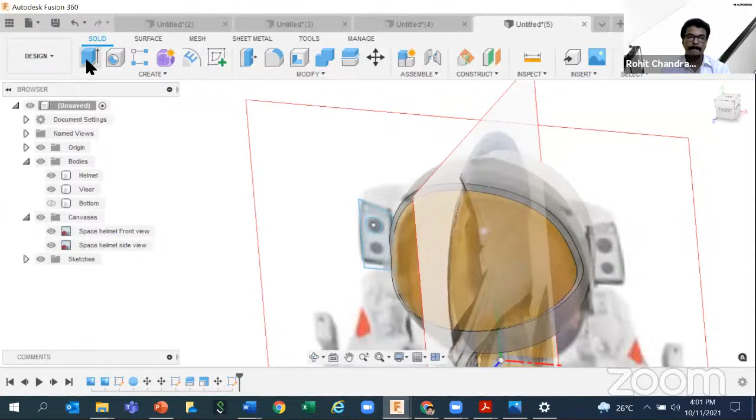This was actually a challenge earlier launched by Airbus to design a futuristic helmet with fusion. Similarly, you can add a separate body like this. You can add fillets, you can change the physical material. As much modification as you want, you can add it. So that's the activity for you.

If you want some extra design, take from the image or hand draw it and show it to us, just to check your progress. Do it and save your respective project, then you can invite me to your project. In the people tab, type my official mail ID or Shubham's mail ID. Then I will get the invite from you, so I can check your work and see what you have done. I can also show a few good designs in tomorrow's session.

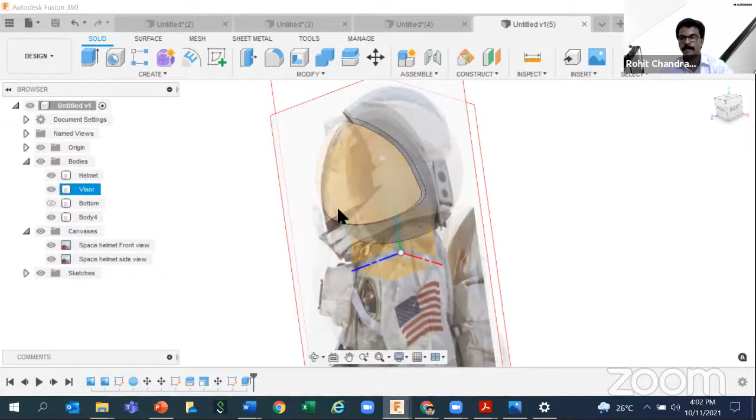So anyway, I hope I answered the question of how industrial design differs with different materials and metals. Because plastic, wood, or anything you want, you can control the properties so that the exact thing comes to your digital environment. The same goes for render, because tomorrow we will learn rendering - how texture and minute ups and downs affect the rendering, that is also good to understand. But this is optional for you - physical material, appearance, sorry.